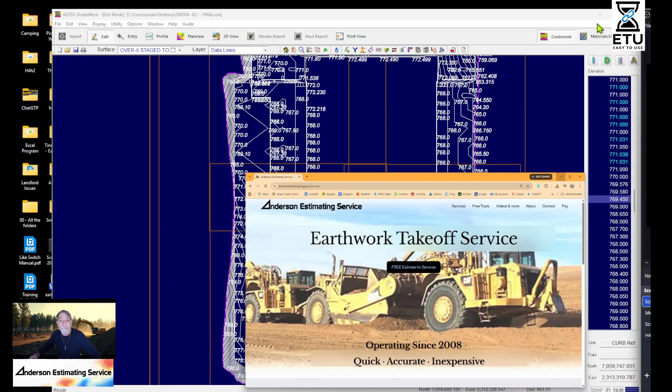So let's go look at this takeoff, okay? So here it is. Hopefully I have the mic. Yeah, I have the mic on, did that the other day. So let's take off, I'm going to take off these elevations. We're going to look at this.

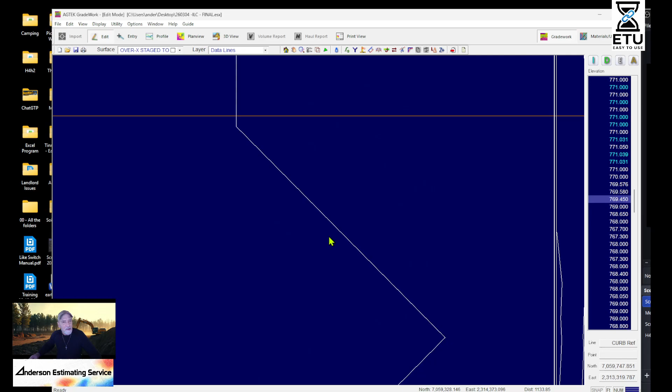First off, we noticed before that there's no grade break lines. So what that creates is this flat spot, because the computer, although it's trying to cross section this way and help with triangulation, if you looked at your triangles, it's trying, but it's going to be flat in here because this triangle is going to connect to this, it's all going to be the same elevation. So if you looked at this, let's go - yeah, that's the lowest one we can go. See how it has pluses?

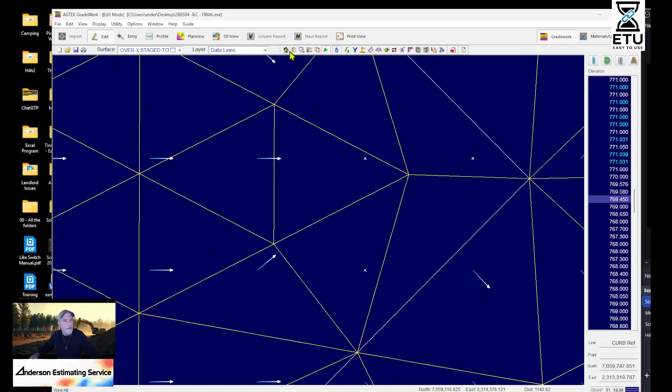So this is all flat, this is all going down to a flat spot, so this is actually flat. If you looked at this in 3D, it looks great, isn't that neat? It looks great, but it's so bad.

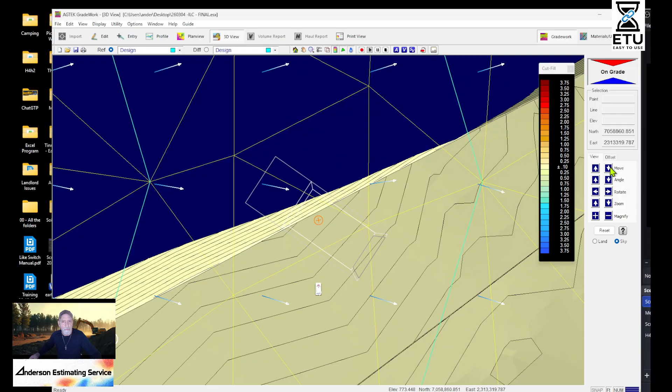Is this? Yeah, this is it. Over X, let's go to the design, we're just going to look at the design. So look at this, this is supposed to be a dock. Hold on, I didn't even notice that before. This is supposed to be a dock. Oh my gosh, they missed the 4-foot vertical.

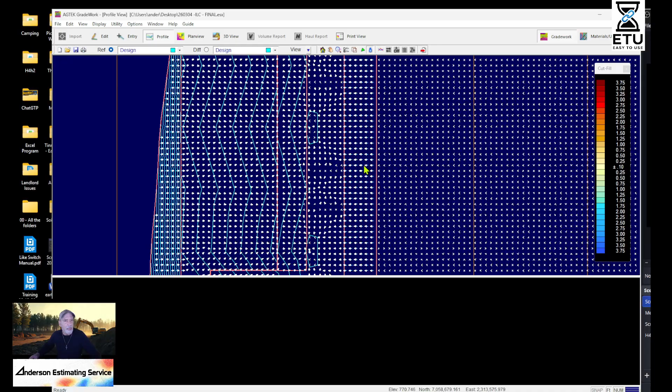It's even worse than I thought. It's angled down. We can just go in and enter a cross section, go into profile, let's get rid of these grid spaces. These are all the things you want to do when you're previewing. See how it goes straight down? I'm sure that's dock high. Let's go edit - oh, I don't have the plans, so I don't know, I can't really tell. Let's see what their section here is.

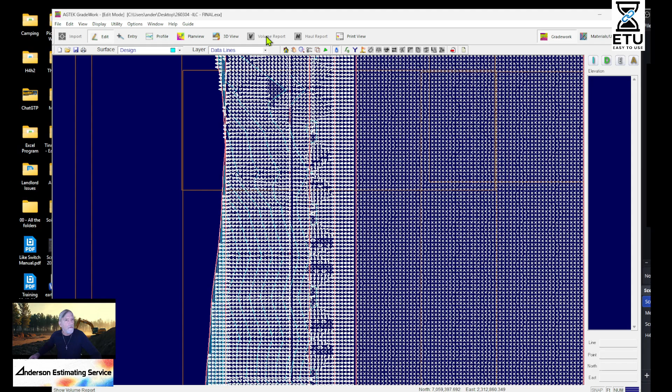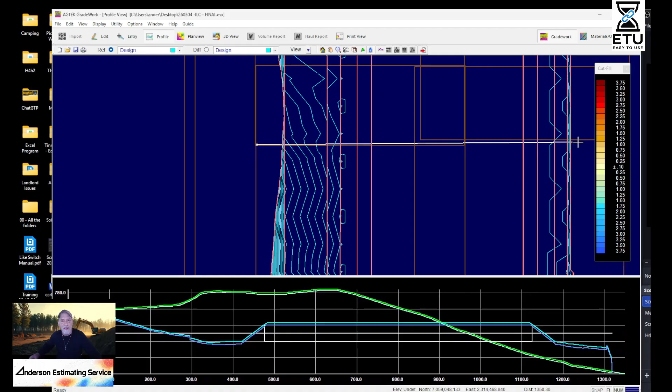If this doesn't look right, let's go into profile, and we're going to enter a profile. It's calculating, come on baby, calculate. I bet you a dime to a dollar that is supposed to be a dock. Yeah, this is a dock high building. There's no way. See, yeah, this is a dock high building. Why would you build a building like this without it being dock high?

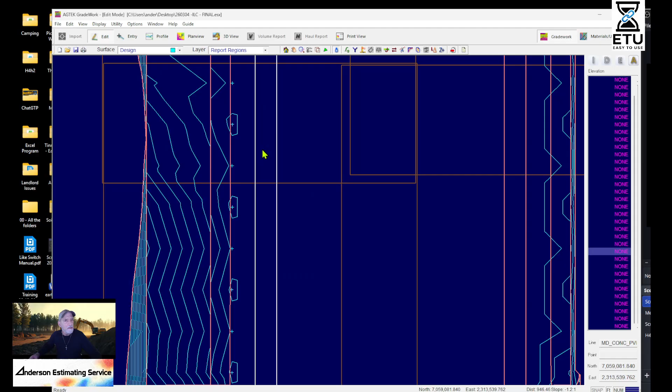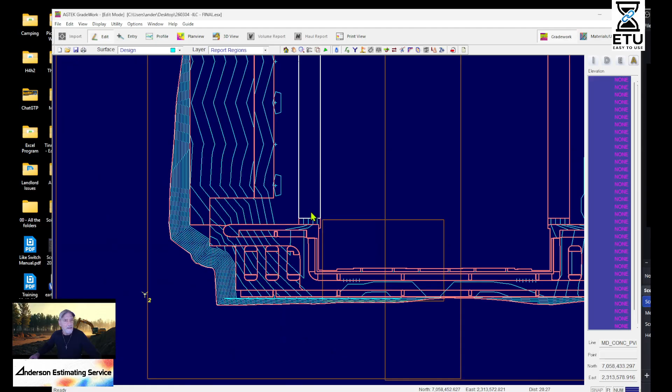Let's just see what these sections say. Edit, report regions, and it says concrete paving, heavy duty concrete paving, and it's 6'7", not 6'6". Yeah, see, there's a ramp, so this is even worse than I thought it was. There's a ramp coming up to this building. The only reason they would put a ramp there is if this was a dock. So this is even worse than I thought.

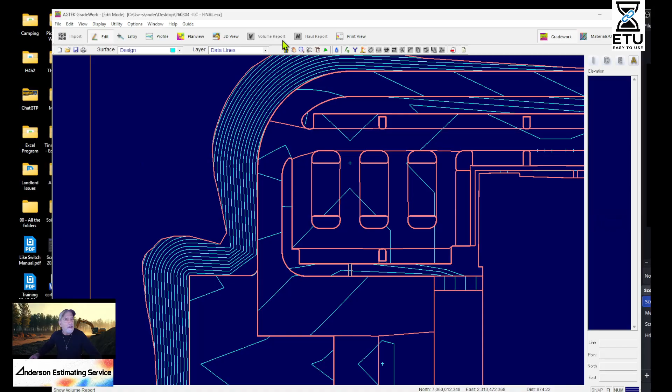Yeah, this is really bad. But anyways, let's go look at the obvious problems, okay? This is what I see all the time - data lines. We're going to go in and take off these report regions. Well, let's go in here and look at this, right? Oh, here's where I saw it the most.

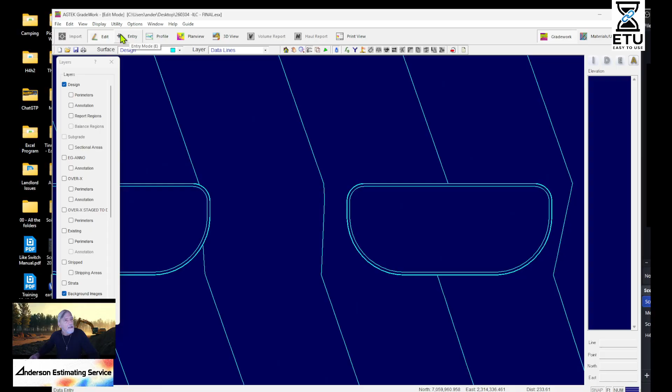Let's see, oh here's some fun ones. This is the fun one I saw, right here. So what they used was utility, display elevations. What they used was the conform to data line. And this one I fixed.

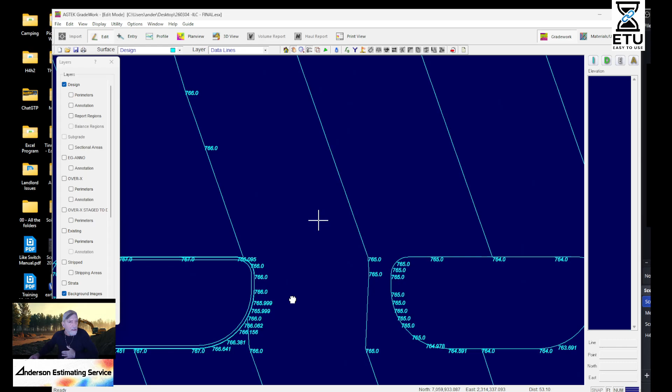Go to the one over here. There it is, see? So 67, 66. It was 66 throughout the whole thing, right here, there it is. 70. Oh, I fixed a lot of these, trying to show them. There it is.

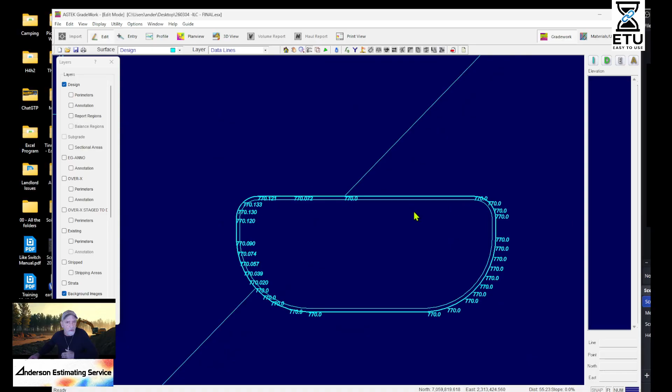So you can't. What they did was they conformed to data line without putting. So this is 70, right? This is 770, so they just connected this 770. It's all 770 from here around that whole thing. Well, that's the same thing over here, 770. So they just did the conform to data lines. You went up here, utility, conform to data lines, and that's what they got.

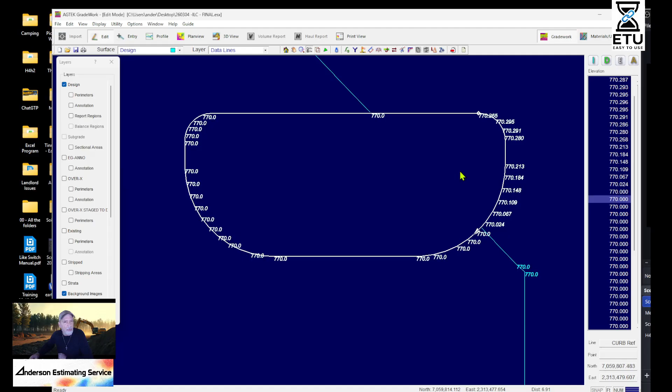This is not right. This can't be 70 all around that corner. There's a point right through here, there's a low point or high point. Let's see, 70.3, 70. I don't have the plans, but I can guarantee you that if this is 69.1...

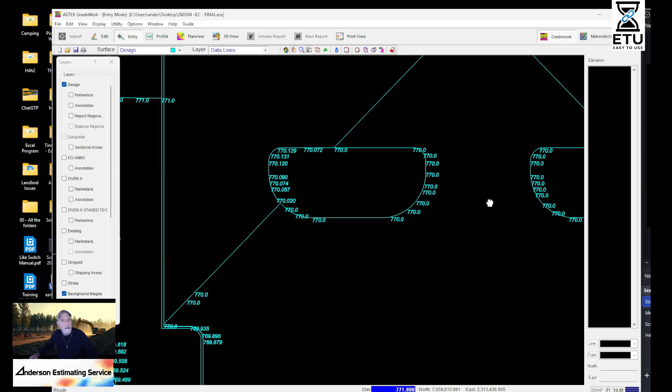So if we connected this, watch this. We put a point here, and then we connected to this one. This is 69.6, so this is about a half a foot high. Yeah, this is a half a foot high.

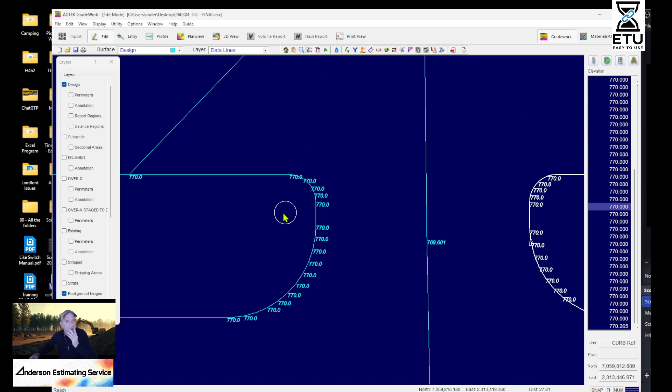These elevations all around here, we know that this can't be all 70. So this is really bad. And then this is a ramp up to the building, so this is obviously a dock. So they didn't catch this dock.

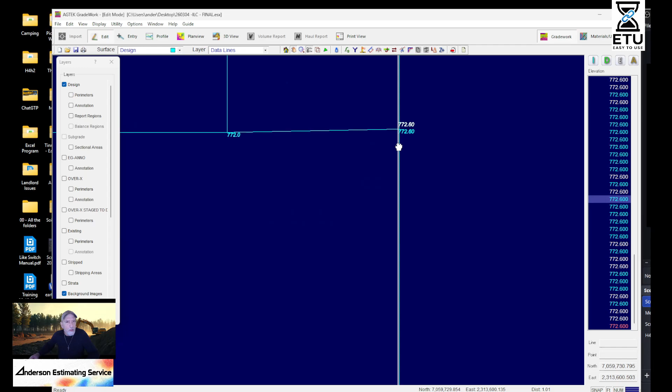Oh, here, let's see what they have. 72.6. Oh, I see this all the time. Somebody's teaching people to go a half a foot out and just at the same elevation. Yeah, this whole thing is a dock. So this whole area right here should be 68.6.

And then it'll go over to this 68, so it goes down into this drain. So this whole thing is a 4 foot high. And since there's no high points and low points, these all should be high points and low points.

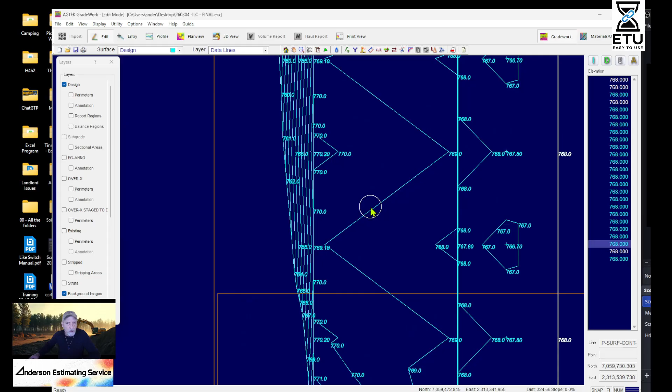This whole thing is a flat spot. This whole thing is a flat spot. Go into there. Yeah, I see this all the time. It's all flat. Everything in here is flat.

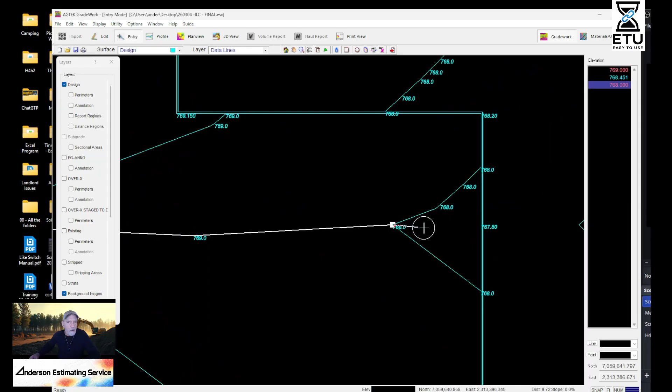So this point right here, entry, since they didn't put this ridge line... and we'll connect up to that, 67.8. This whole thing, yeah, it should be doing that.

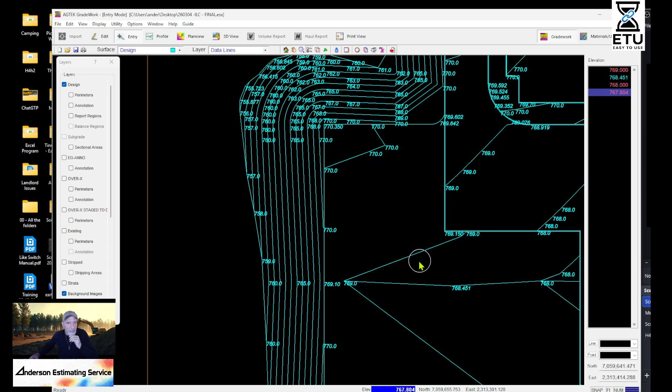So this is 68, so that was actually a half a foot high. Yeah, this whole thing was a half a foot high. They're just generating this big, terrible model.

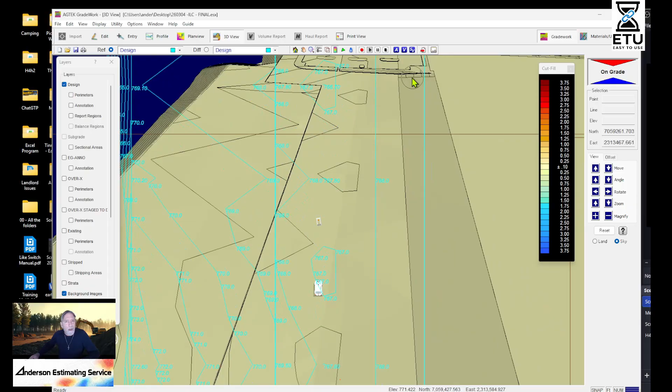And then the problem is when you look at this, wow, it looks great. But this dock is not a dock. This whole thing is not a dock. So, yeah, this is pretty bad. This is pretty bad takeoff.

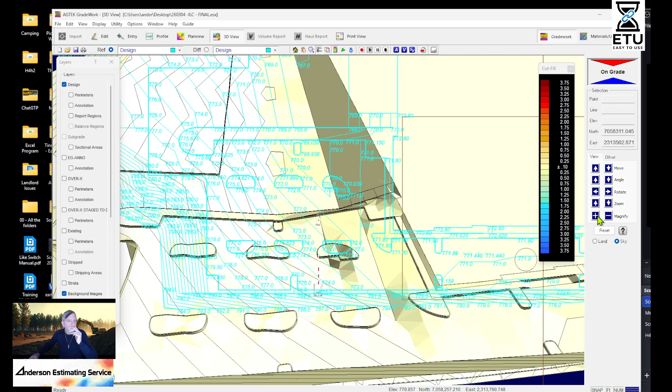Look at, and I can see there they did it again, see how it's all like all these little plus. You just go up and just start pushing plus, magnify, you can really see the errors. You can see this whole pad is, zoom out, is incorrect. There's no way that there's a slope on that pad that matches the ramps.